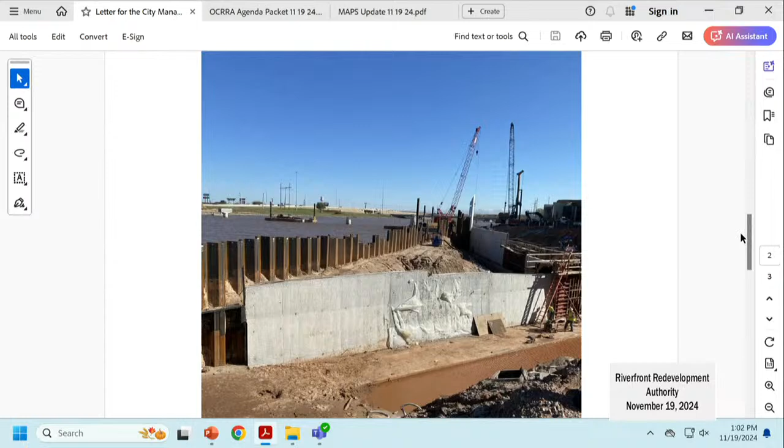Some more activities that we still have going in the Oklahoma River corridor. Obviously, the MAPS 4 pedestrian bridge and the First American Museum riverboat landing. I did get an opportunity to take some construction photographs. Here you can see the FAM landing going from west looking east. At the lower section of the picture is the foundation, and the vertical walls are creating the inlet of the landing itself. They're soon to go ahead and start the backfill part of this project, and so they'll also remove that material, and the sheet piling will be removed shortly as well.

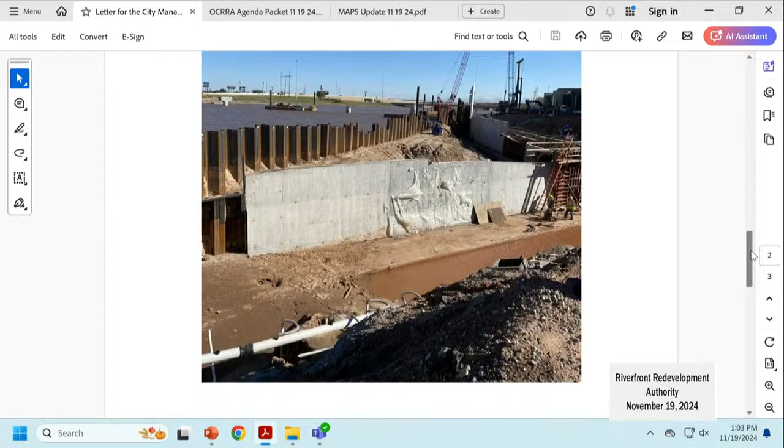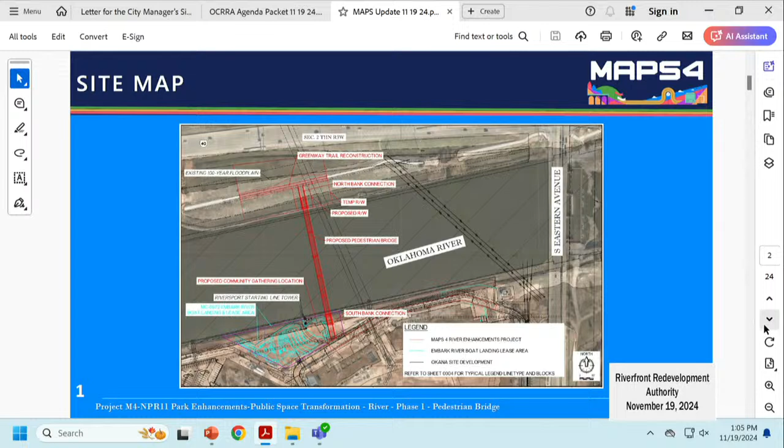But anyway, and you can go to the next slide. This is a rendering, an architectural rendering of what's going on down there from the perspective of the bridge and the embark landing in the light blue on the lower part of the page, circled in purple. That's the embark landing. The bridge naturally is the red. And all the rest of those lines are utilities and things of that nature.

The geotech for this project indicated that the bedrock was going to be at a certain depth, and it wasn't. There are areas that were about 16 feet deeper than anticipated, which has actually turned into about $300,000 worth of amendments to the contract, but we're still in really good shape as far as the project goes, and it is going well.

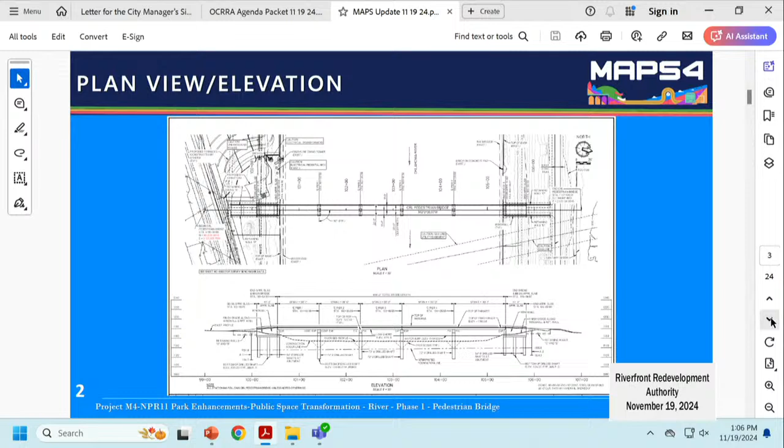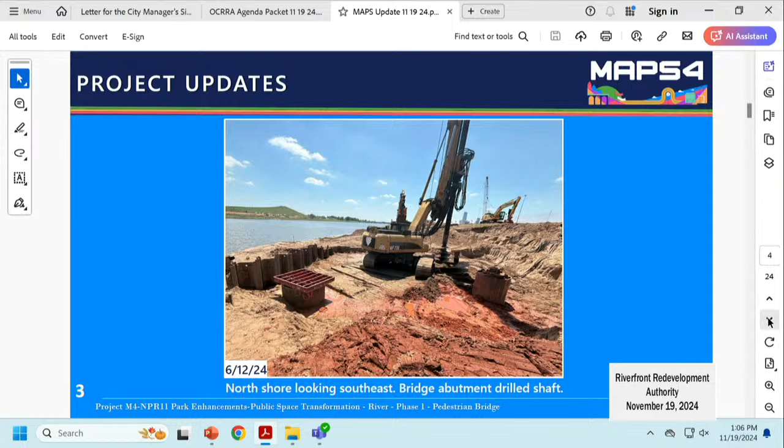This is an aerial photo of the north section of the bridge. If you'll notice, there's a crane that's sitting on the top, and then there's one to the left. The one on the left has already been loaded onto the barge, and if you ever want to see something a little exciting, you've got to go watch them load one of them on a barge.

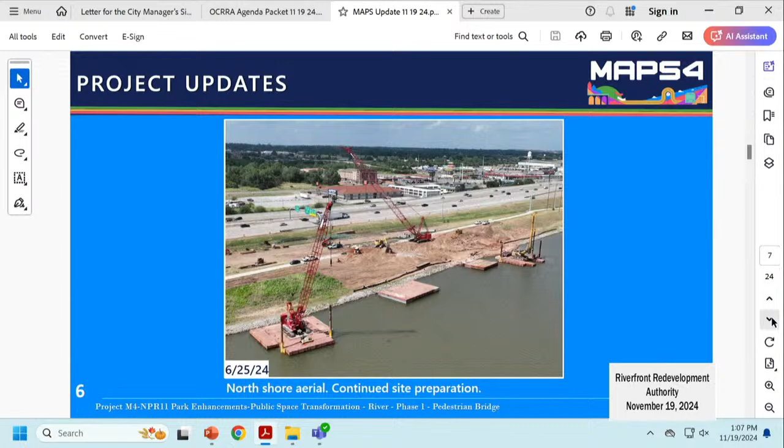What you see here, all this steel that's sticking out of the ground, these are 40 feet in length, and they are compressed into the soil. Then there's subgrade work that's done on them. There's fittings and steel and all kinds of stuff that goes in. There's a picture here in a minute you'll see of what goes on top of those, but that's basically just to stabilize the ground there because it's also sandy.

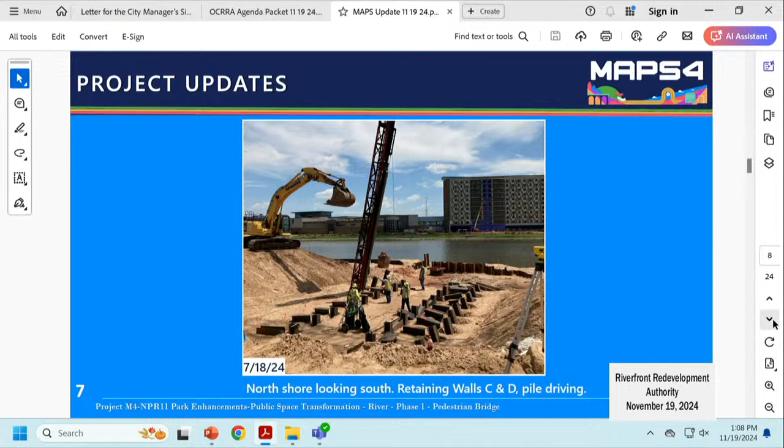This is a picture of a retaining wall on the North Shore. If you look to the inside of that, you can see those great big footings that are sitting there to hold all this in place. We sure don't want it to fall at any point.

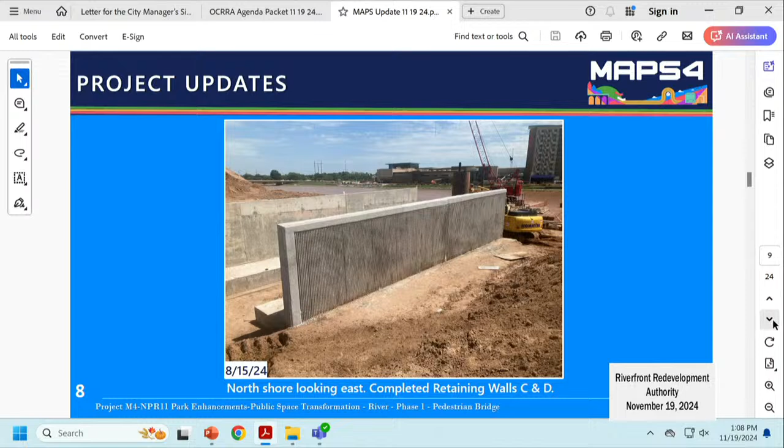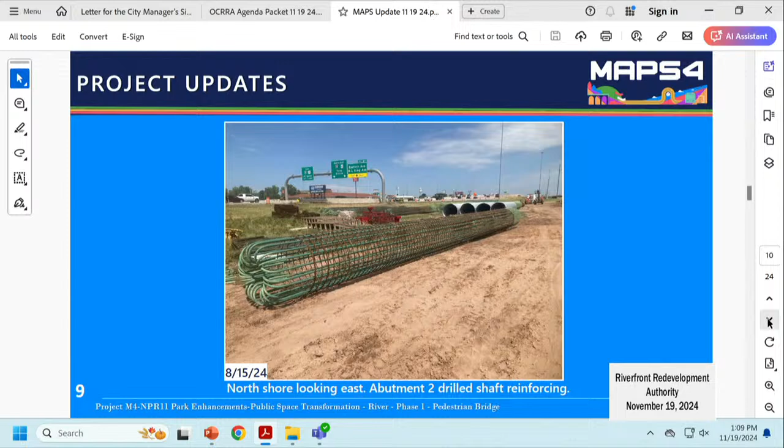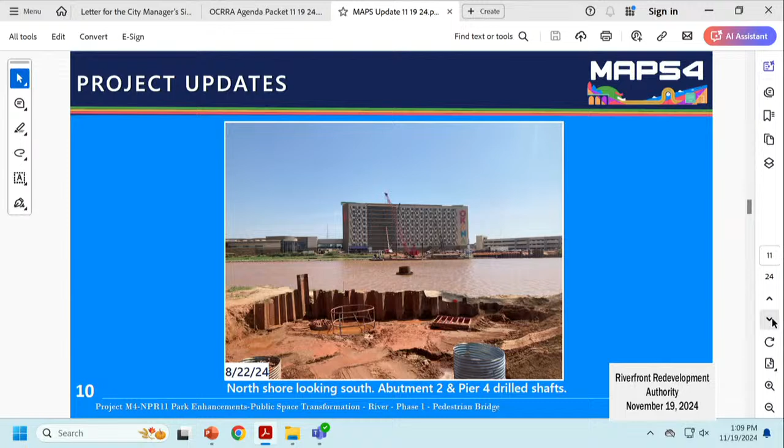This is a situation where we had the crane out there. We had a crane on the bank that was bringing stuff out, and the drilling rig out there as well.

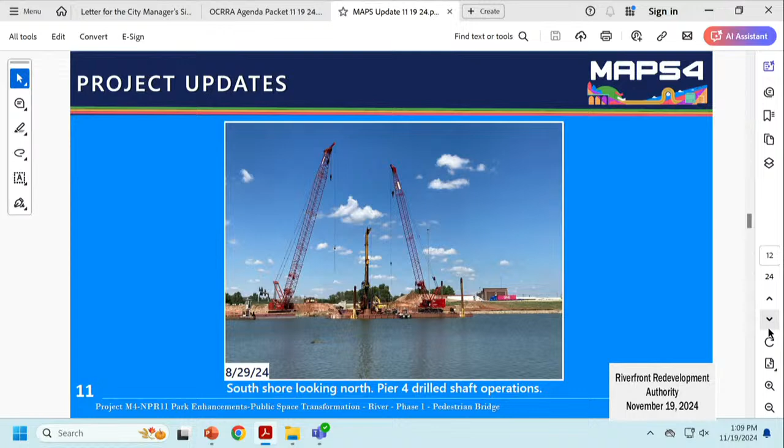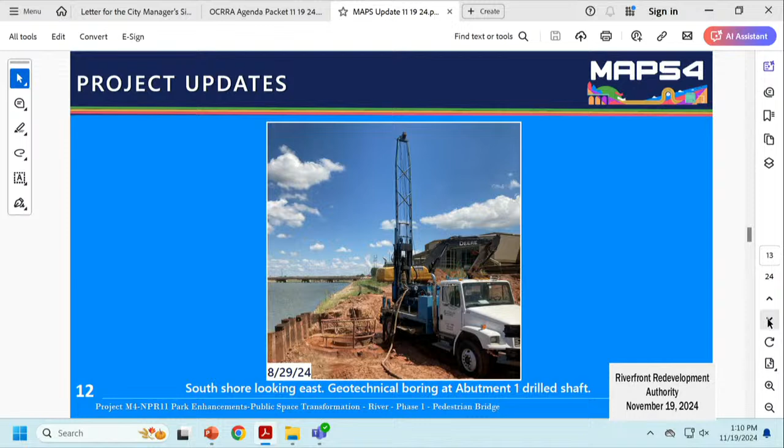A minute ago, I mentioned that the bedrock wasn't where it was supposed to be, so we had standard testing come out. When they test this soil, what they'll do is put a hole here and a hole here and a hole here, to get a general idea of what the bedrock depths are. Well, we had done that and we were still missing, so I had them actually come out and drill a test hole at every location where the piers were so we'd know exactly what those depths were going to be.

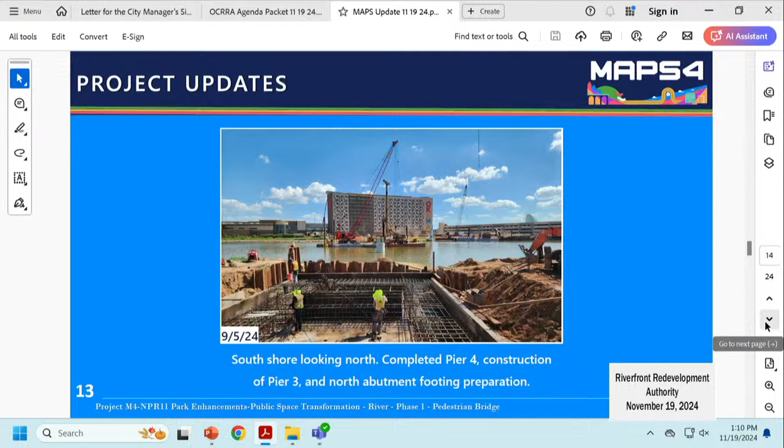This is some of the infrastructure that sits underneath some of those great big steel beams you've seen sticking out of the ground. If you'll notice all of the steel that's been tied in there, and then all that gets poured with concrete. In the background there, you can see pier number 4 that's sticking up out of the ground right in front of the barge.

This is another aerial shot of work that's going on, on the south bank. We had the same problem with the pier depths on the south bank that we had on the north bank, so we just had them basically spot drill every hole to where we'd know exactly where everything was going to be.

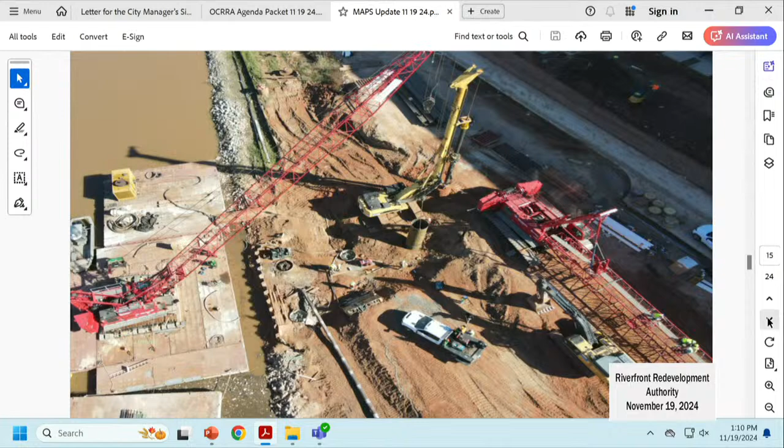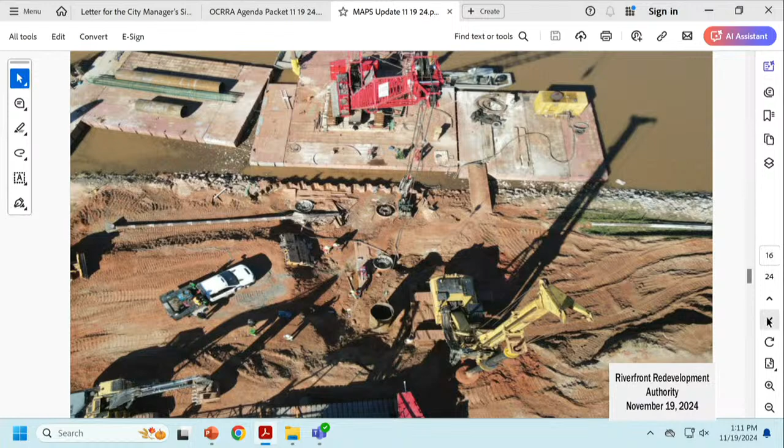Again, this is just another picture of that same bank. I thought it was a good picture to include because it's a good aerial shot of what that crane looks like sitting on those.

Just to the lower right of this is the embark boat landing. I didn't know Jess was going to give a presentation today, so I don't know much about it, but I did want to show you that there's at least some progress going on there.

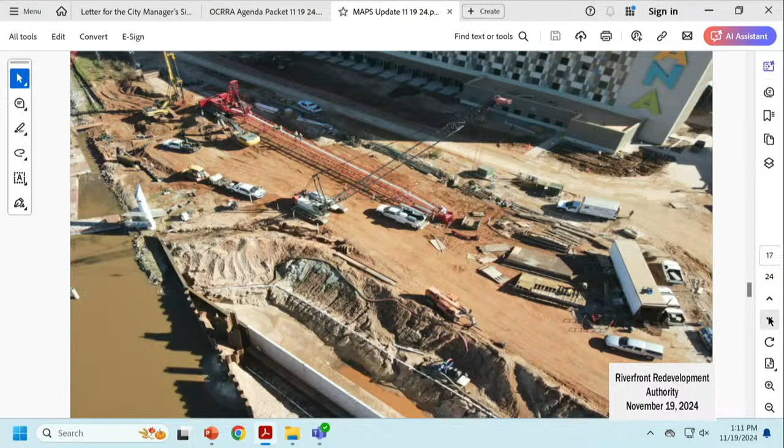This is pier number 4, the first pier that we've got a pier cap on. It's ready for steel. To the right, that backs up to I-40, that's the embankment and wing walls that come to the approach of the bridge. The steel required for this was procured early, so it's sitting in the yard ready to go. As soon as they get the other 3 pier caps on, they'll start erecting the steel on top of them. Pier 4 is the closest to I-40, then 2, then 1 is closest to the south bank.

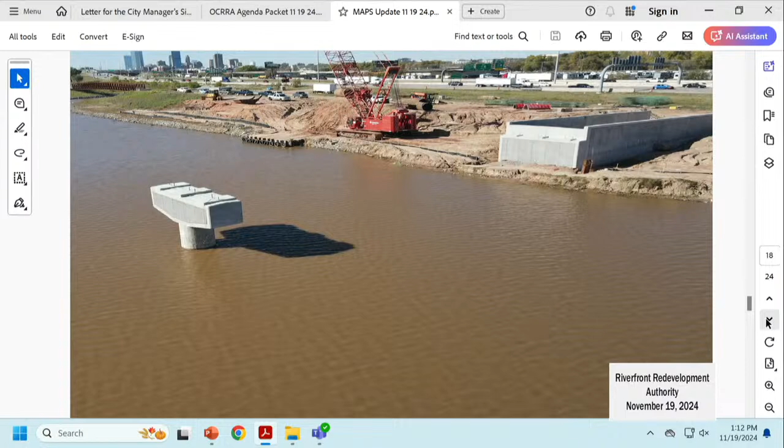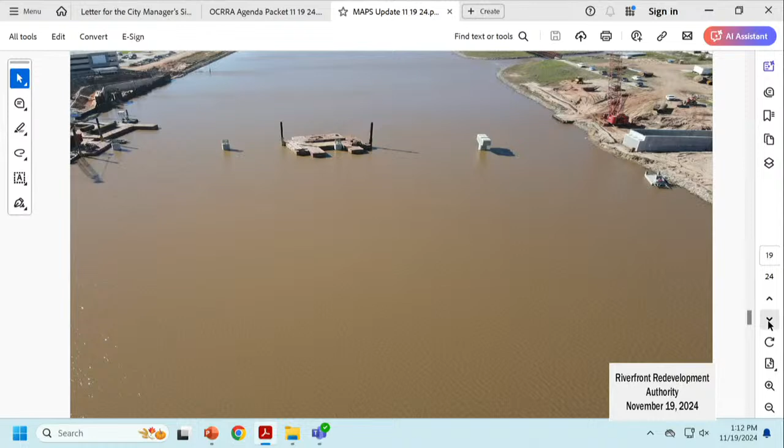They are working on pier cap number 3 now. Again, this is a good shot right here, showing that first pier cap on pier 4. You can see pier 3 sitting there in between the riggings, and then 2 and 1 that get closer to the shore.

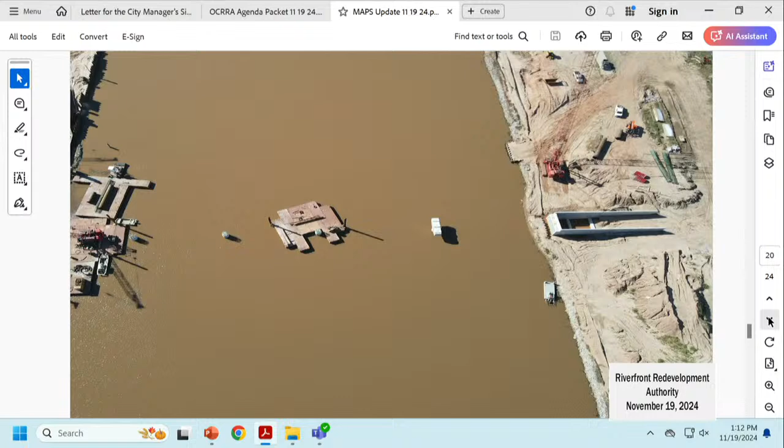Again, just another aerial photo of that same look. This is an aerial photo of what it looks like inside one of those abutments and wing walls, to give you some idea. A great deal of that gets backfilled, and then there are dressings that go on the outside of it. So it's going to be plenty sturdy - built to last way longer than I'm going to be alive.

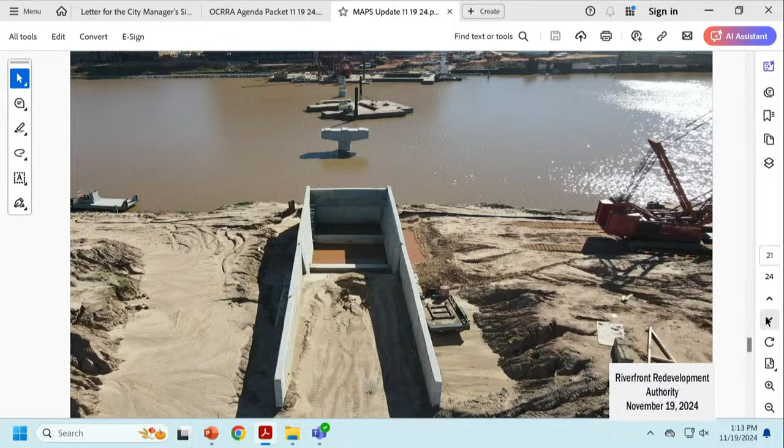Our original contract with Manhattan Road and Bridge was $5,775,863. We've had a change order, but it was no cost - just to lengthen the construction time. Originally this was going to be done when the river was down last winter, but with the delay with the Corps of Engineers and some permitting issues, we weren't able to get started when the water was down. So that's the reason for having to use the flotation out there to do this off of, but really change order 1 was just time.

This is a look at what our schedule looks like from this point forward. In October of '24, we completed the north abutment and retaining walls. We're looking to have completion of all the piers in November, and they are all complete now. In December, we're going to complete the south abutment and retaining walls. At the same time, they're going to be working on the pier caps, which is the dressy part that goes on it that holds the steel.

In February, we should have completion of all the beams. In April, completion of the bridge deck and abutment connections - just going in and pouring the concrete and finishing all that, since this is a paved surface. Then in June, complete installation of handrail lighting and concrete finishes. By July of '25 is our estimated completion date.

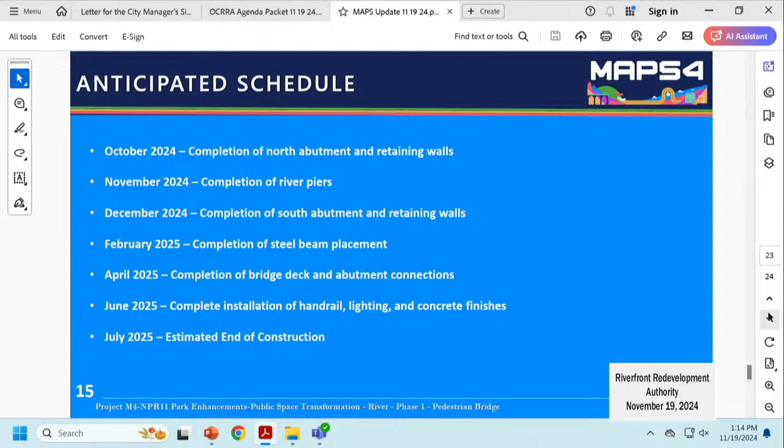So are we going to be walking on the pedestrian bridge in July of 2025? We are. As a matter of fact, I'm kind of hopeful that we might be just a little ahead of that.

I allowed Manhattan Road and Bridge to extend their contract for the same time frame that they lost due to not being able to work before the river was filled back up. So that gave them till June. I really believe that from what I'm seeing right now, unless we have some weather and stuff like that - you just never know - but right now it looks good.

Any other questions?